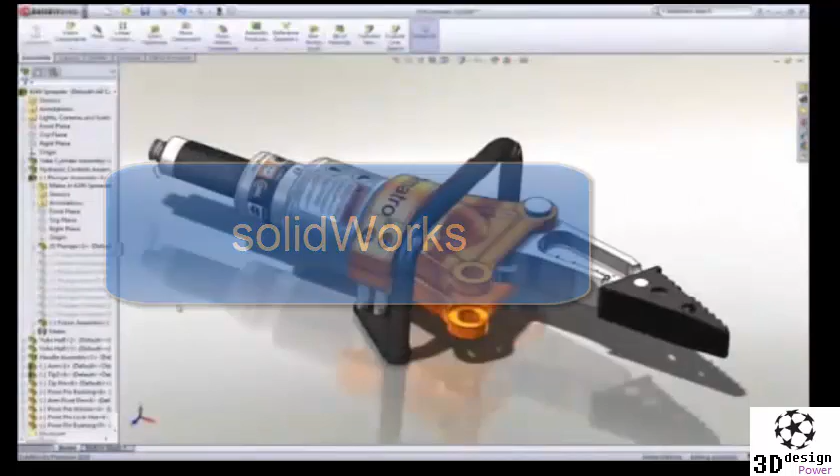This is your first look at Solidworks. In this brief demonstration, you'll see how Holmatro uses Solidworks to design best-in-class tools to help rescuers perform their critical life-saving tasks. Looking at this hydraulic spreader, you can see that there's some work to do. We'll create a part, assemble several parts, and create some drawings. We'll start by designing a new rod-end part to connect the piston rod to the spreader arms.

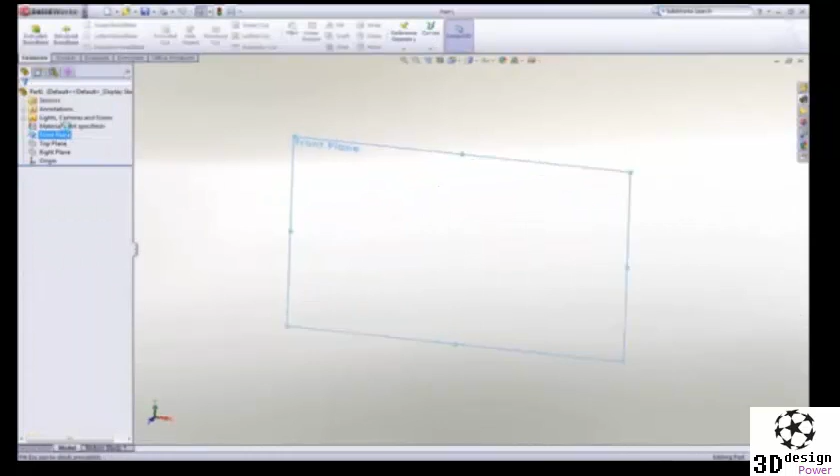The basic building block of a 3D solid model is a sketch, and sketching in Solidworks is extremely easy and intuitive. Using a mouse gesture, I get access to my most commonly used commands. Draw a slot, add some dimensions to establish its size, and then drag the center of the slot onto the origin to locate it.

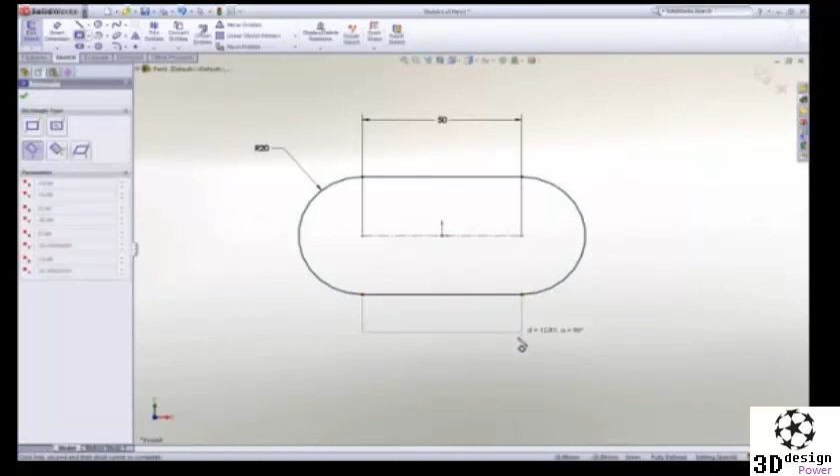Next, a rectangle is drawn using one of the many sketch tools, and then we will add a couple of circles to hold the link pins. The two circles should be the same size, so a quick window selection reveals a pop-up toolbar and an equal constraint is added to lock their size together.

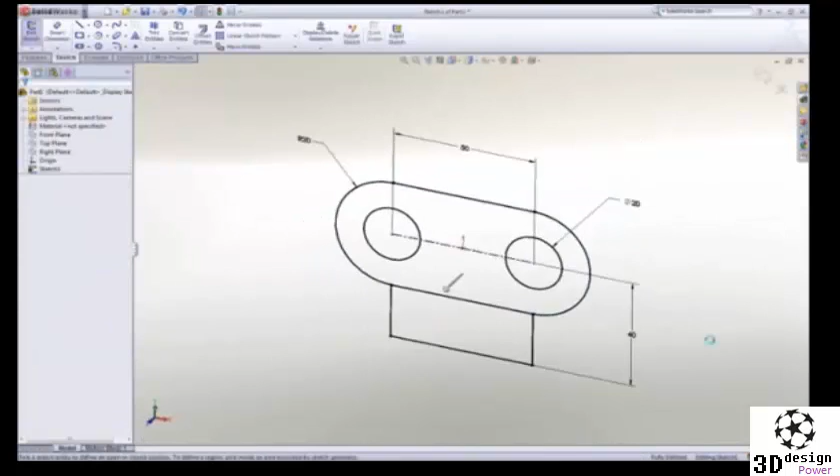Notice that as I work, all of the commands and tools are right at my cursor. We call this our heads-up user interface, which is designed to keep your focus on the screen to make you more productive. Now that this 2D sketch is finished, let's make it 3D by extruding it. It can be extruded in either direction, or in this case we will extrude it 40 millimeters about the midplane.

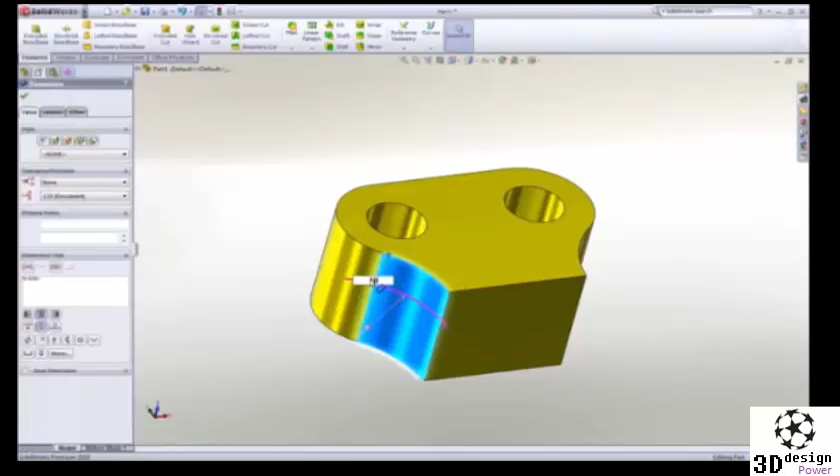To smooth some of the sharp corners, we can add some fillets. Their size can be graphically manipulated on screen, or we can key in a dimension to add some precision. Let's add a pocket to the center of the part to accept some links. This time we will use a center point rectangle to capture symmetry while we sketch, and a dimension to control its size.

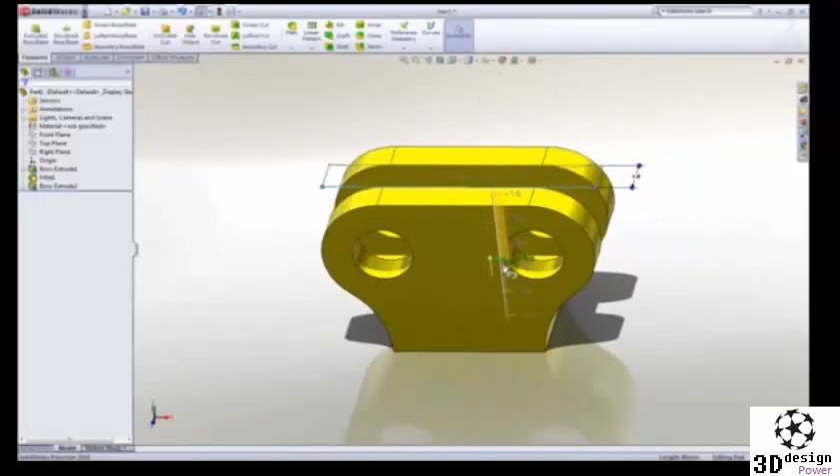Using instant 3D technology, we can add material by dragging the sketch away from the part or remove material by dragging into the part. The sharp corners at the bottom of the pocket can be rounded by adding another fillet. 2 millimeters would be good. Finally, we can ease the outside corners with a chamfer. Using the on-screen feature callouts, we can easily control its size while we create it.

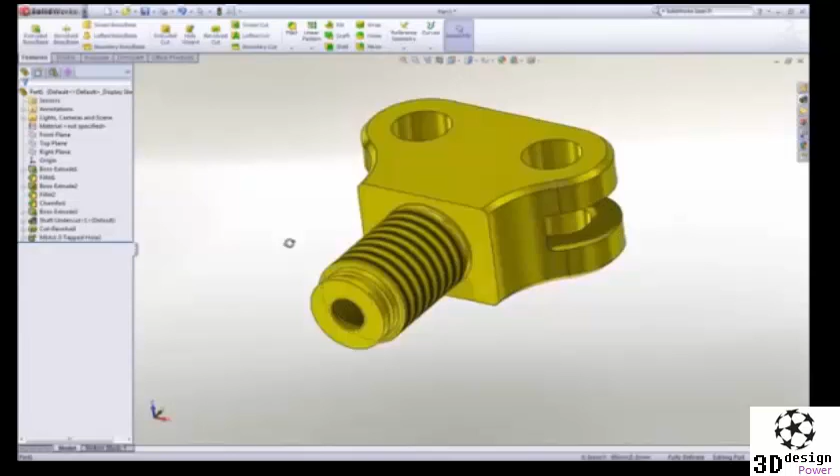Now that you have the hang of it, we will jump ahead a couple features and add a tapped hole at the bottom using the hole wizard. Gone are the days of looking up hole data, because all of the hole types, standards, and hole sizes are available. Choose the hole parameters, locate it, and Solidworks takes care of adding all of the proper information to define the hole. Let's leverage our previously created chamfer by dragging and dropping it onto the bottom edge to make a copy. The part looks good, but maybe a couple of changes would help to refine it.

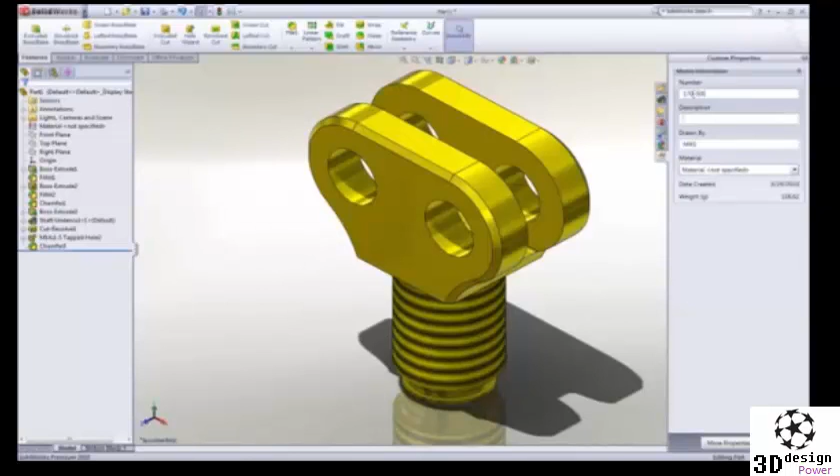Changing the dimension value changes the geometry, and using instant 3D technology, dimensions can be dragged and we get real-time feedback of our change. It's important that we fully describe our part beyond just the geometry. Properties such as part number or description can be added and leveraged later in the drawing title block and BOM. Materials can be applied from a list of favorites or from a broad database of materials. All visual and mechanical properties are applied. Notice that the weight of the part has been updated to reflect the new material.

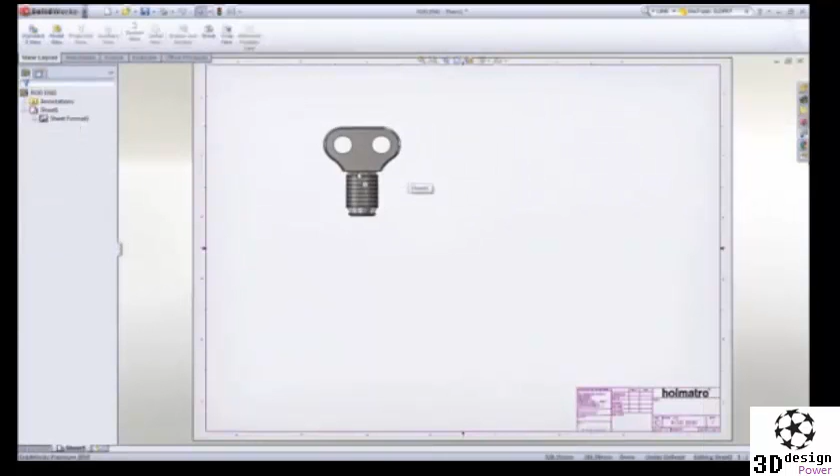To document our design, let's create a drawing. Solidworks displays the default views of the part in the View palette. We simply drag a view onto the sheet, then we can create any desired projected views, including an isometric. Hidden lines can be removed or views can be displayed as shaded. For this part, it would be desirable to create a detail view of the area near the bottom for clarity.

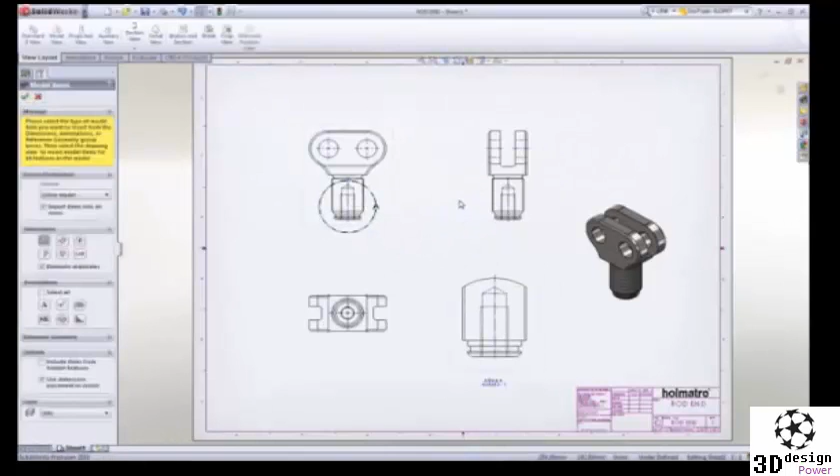Adding dimensions is simple. All of the dimensions that were used to create the part are available to be placed on the drawing. Since symmetry was used during design, we can add a couple dimensions to locate the round boss at the bottom. The Rapid Dimension Manipulator appears to properly place and space the dimensions at even intervals.

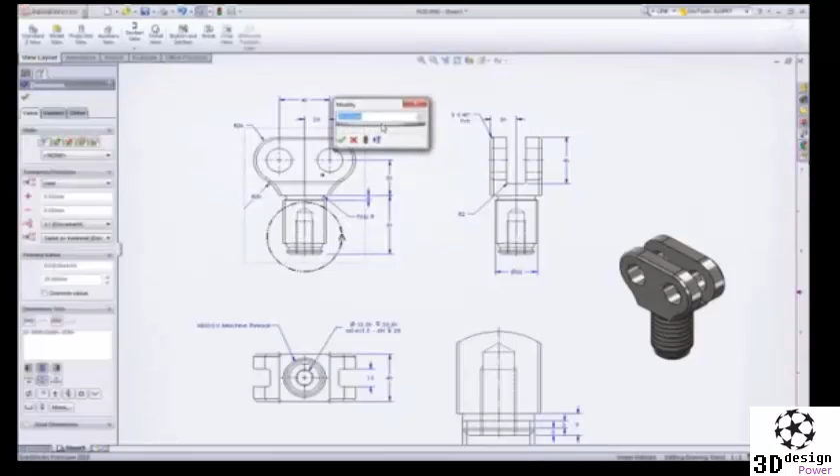Selecting a dimension, we are presented with a dimension palette where we can add more definition to the dimension, such as tolerancing or formatting. These 20 millimeter holes will not accept the 22 millimeter pins that we will be using. No problem. Making this change right here on the drawing will update all of the views and change the part as well. Let's move on to do some assembly work, and with Solidworks, it couldn't be any easier.

For our rod end, simply drag the round boss and drop it onto the cylinder rod. This adds a concentric assembly mate between the parts. To position it along the axis, we can drag the edge of the rod end to the end face of the cylinder rod to add a coincident mate. Next, we will add a link to stop it from rotating.

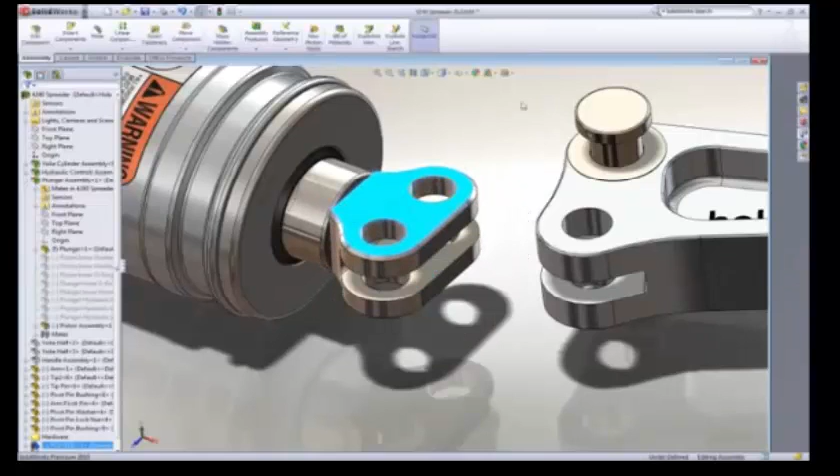To find this part, we will enter link in the search assistant. Solidworks not only returns components with link in their file name, but also digs down into the part properties to find the term. As before, we can drag this link from the search pane and drop it on a circular edge of the arm to locate it. Then, using the same drag to mate technique, we can hook it to our rod end.

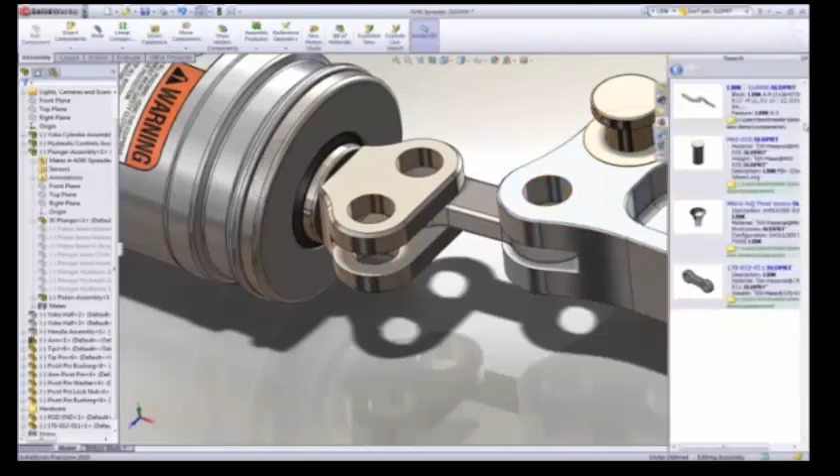From the same search pane, we can assemble the pin. This pin was modeled for multiple uses and contains many sizes or configurations. We simply choose the diameter and length that is desired, and Solidworks builds the part to specification.

Most assemblies contain many hardware items like screws, nuts, washers, and the like. Solidworks provides a toolbox of such items containing thousands of parts with millions of configurations of those parts for your use. Notice that as we assemble the snap ring, it automatically sizes itself to the shaft to which it is placed.

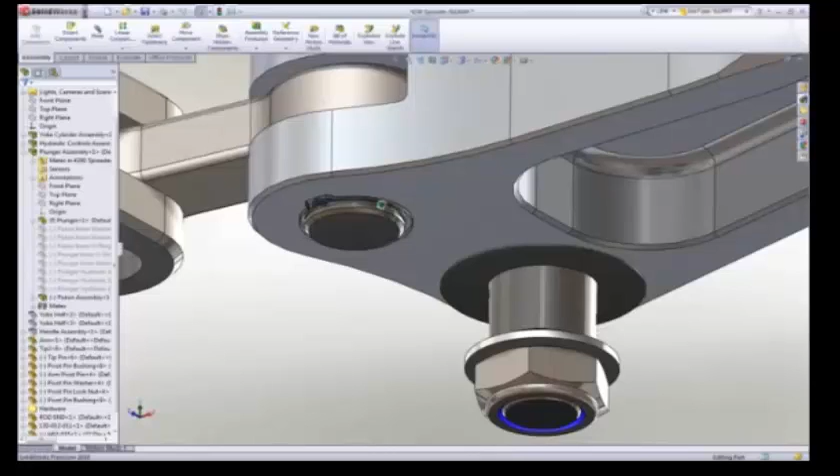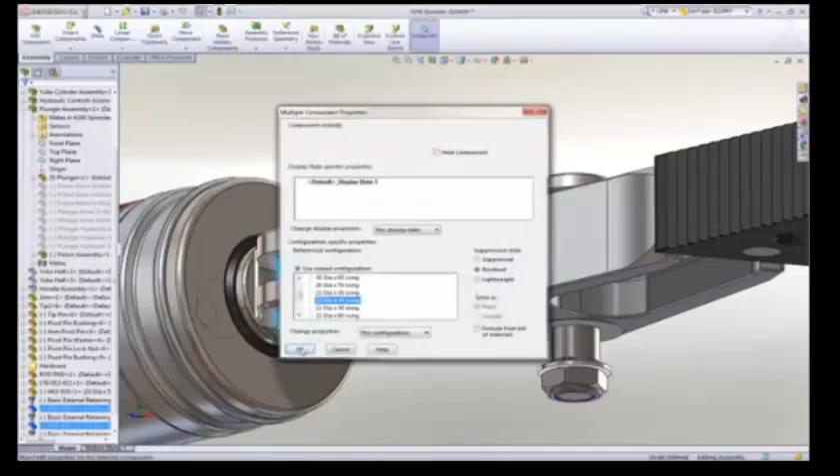Solidworks allows us to copy parts along with their mates, which is a big time saver. Simply identify the hole and mating face for each hole where the pin is to be placed. As you can see, these pins are too long for the rod end. Remember, the pin was modeled in multiple sizes, so we can easily change the length of just these two without having to reassemble.

Interference detection is an important aspect of 3D design, and Solidworks takes it a step further with real-time collision detection. Notice that as we move the arm through its range of motion, it interferes with the link. Solidworks provides both visual and audible feedback of the collision.

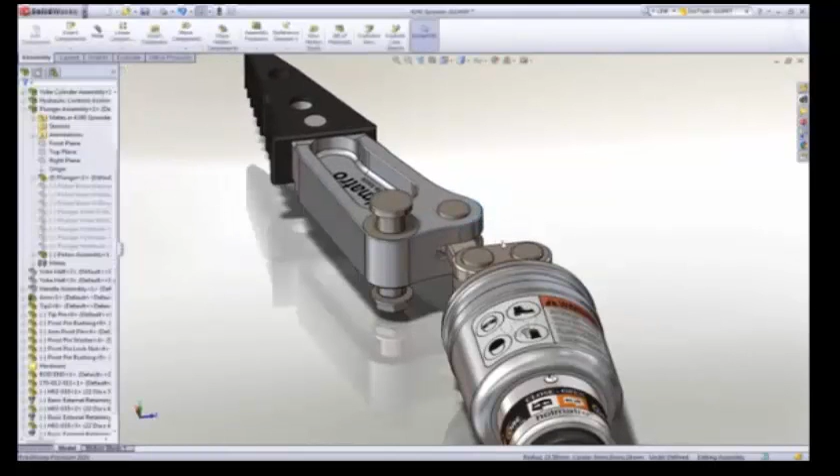A change is in order, and it can be done directly on the part right here in the assembly by changing the angle dimension defining the pocket on the arm. Now, as we recheck for collision, we can see that we have full range of motion with no interferences.

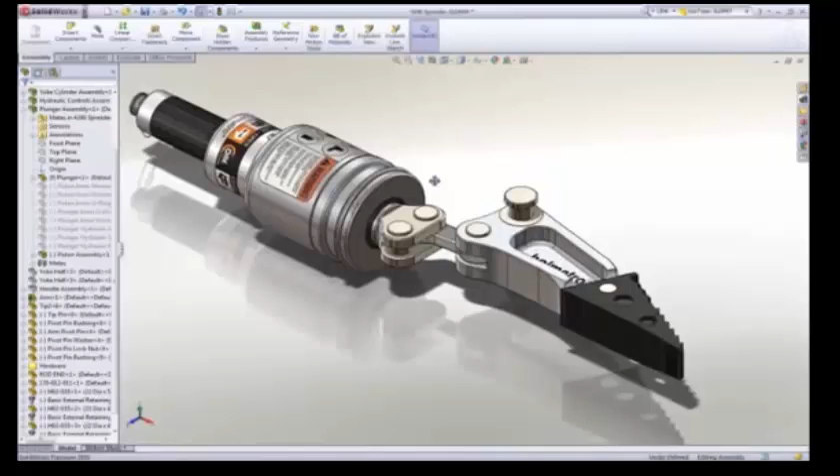Half of the spreader is complete, and we can save assembly time by mirroring the parts about the central plane to the opposite side. Solidworks allows us to verify and change position of each part, and even to create opposite-hand versions of individual parts. In just 2 minutes, there were 19 parts added to this assembly, and our assembly task is complete.

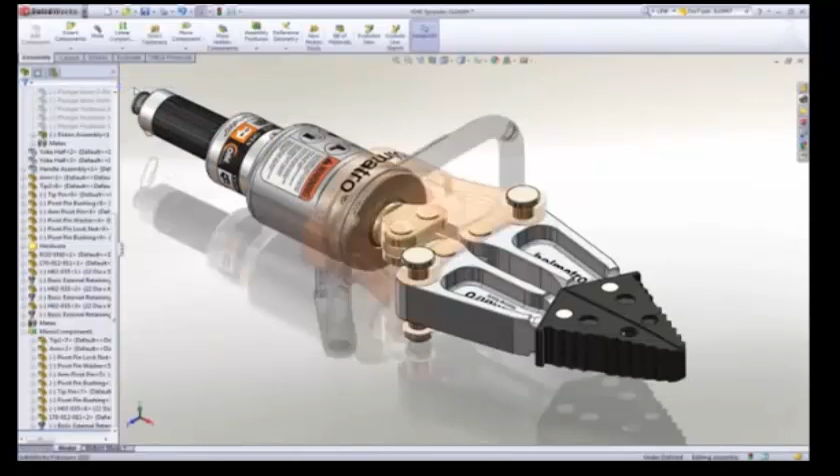Let's turn on the parts that we have previously hidden and document this assembly. We'll wrap up the demonstration by creating an assembly drawing. As we did when creating the part drawing, we can drag the required views onto the sheet. To better describe this spreader, we will use an exploded view of the assembly.

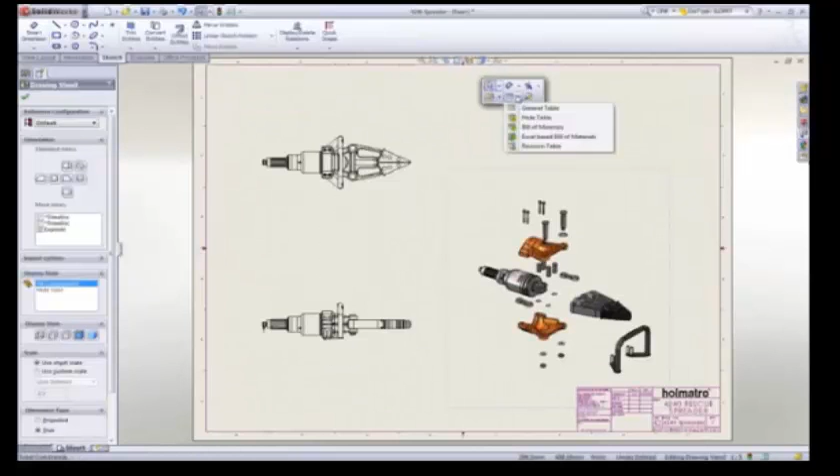No assembly drawing is complete without a bill of material. Solidworks itemizes the parts, extracts information like description, and adds the appropriate quantities. No bill of material is complete without balloons, and they can be added automatically.

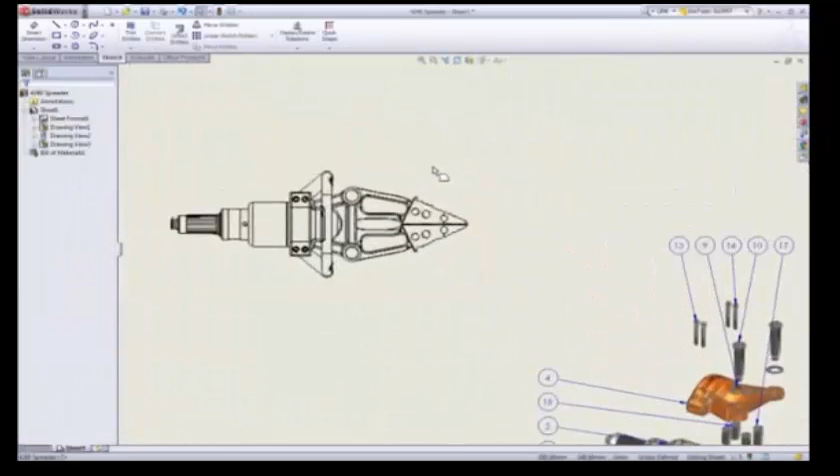To depict the motion of the spreader assembly on a 2D drawing, we can add an alternate position view to describe the assembly in both the open and closed positions. Add a couple of reference dimensions, and our assembly drawing is complete.

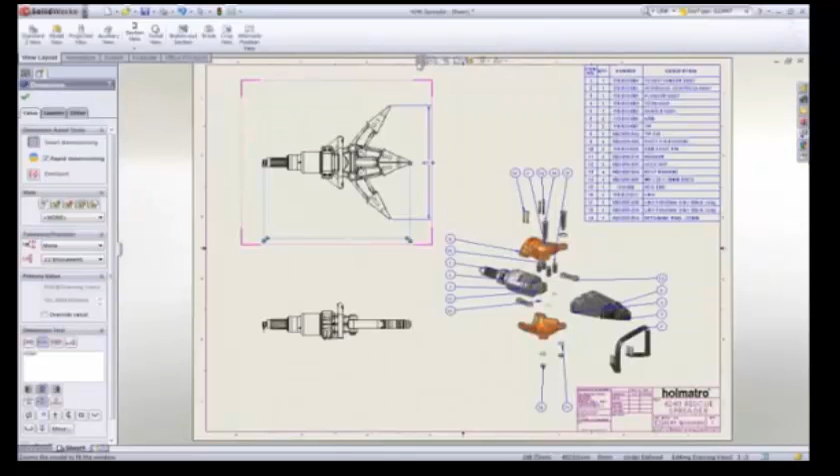We strive to deliver simple but effective tools to help you design better products faster. When you have an idea for a great product, Solidworks provides the tools to design it in less time and at lower cost. This has been your first look at Solidworks.